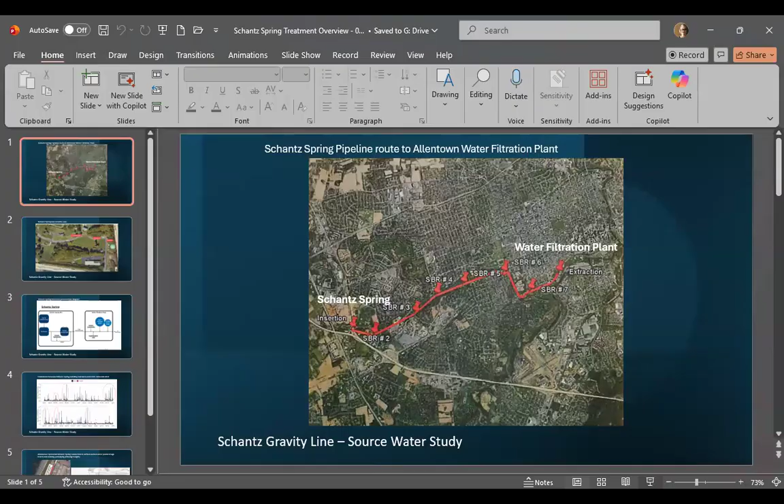This project's goal is to optimize Schantz Spring for increased protection of public health. We've got some graphics in a presentation to aid understanding. Schantz Spring is classified as a groundwater source and not required to undergo coagulation treatment or filtration. It is, however, sometimes impacted with turbidity during rain events.

The spring takes that route shown to get out to the water filtration plant, where it's currently integrated and sent through the distribution system, not currently filtered. For this project, we are continuing work to improve that quality to maintain public health during any rain event.

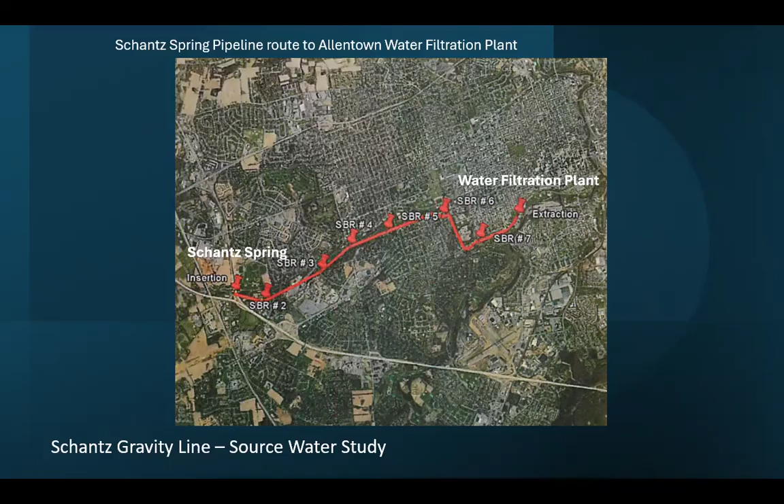There was an authorization done in March 2026 to begin conceptual design for the new interconnection at the filtration plant. With this potential coagulation and filtering, it'll just need to be routed into the plant at a different location than currently. Right now it just goes in and is pumped out through the distribution system.

This pilot testing authorization that GFT is proposing will continue on a larger scale the bench testing that's currently ongoing. They're determining coagulant dosing, filter effluent turbidity, head loss, filter run duration, and backwashing effectiveness. That pilot test we'll be authorizing today will influence the final design for the full-scale filtration that'll be installed.

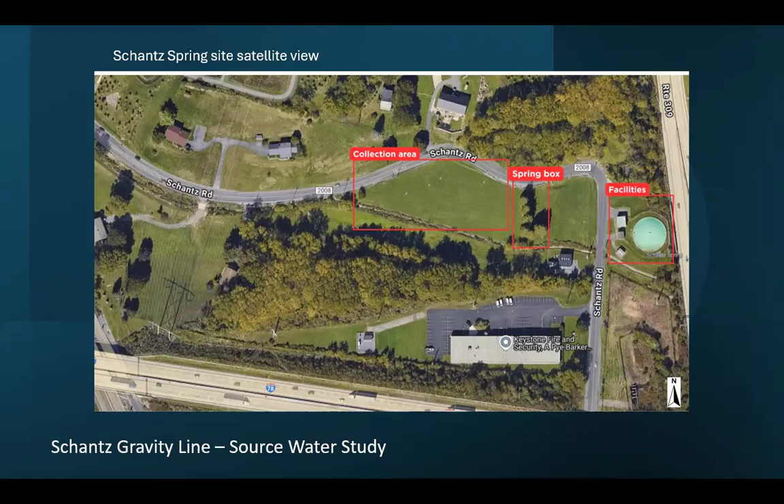On the screen we've got an aerial shot of Schantz Spring currently, showing the collection area and spring box. In the facilities over there is a reservoir. Part of this authorization will also determine the location for whatever treatment, whether at the Schantz Spring site or at the water filtration plant.

This illustrates the treatment process that will likely be implemented.

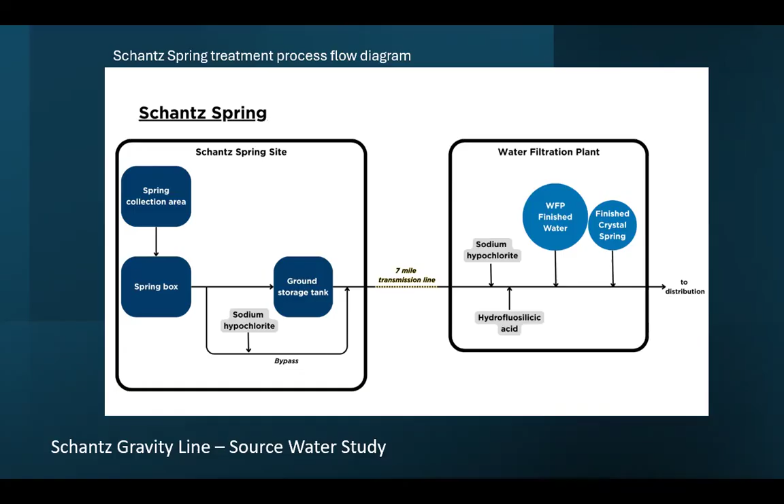These are potential connection points on the left side of your screen. In parallel, that conceptual design of the interconnection is currently ongoing, also with GFT. Today's authorization is just for the pilot scale filtration.

There's a lot of pipes in the ground along the areas outside of filtration. So that's what we're working on now, determining where we can get Schantz integrated into the filter system, ideally in a way that it mixes thoroughly with source water that's already being filtered, so filters don't have uneven distribution for what they need to do as far as filtration of the source.

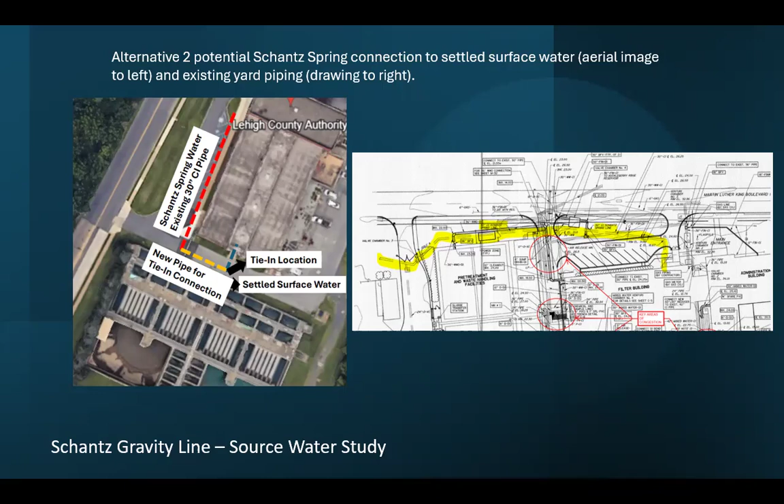So for these professional services to be authorized: project coordination, planning, pilot test protocol, the pilot test equipment, the testing itself, and then data review and reporting, assuming authorization of the planning phase work at this meeting. Expect to begin May 2026, with completion of testing in October 2026, and a final report submitted by December 2026.

Just want to offer one clarification on the paperwork. The total capital project authorization amount, or the total amount we're authorizing, is $234,800, but the professional services authorization is shown on the second sheet as $184,800.

How big a line runs from Schantz Spring to the waterworks? I think it's a 30-inch line. Yeah, and it flows by gravity, 7 million gallons per day, right around seven. How long's it been in?

Okay, I think the next item is the Kline's Island Sewer System Act 537 plan. Just for your information, those are on the white pages, pages 69 to 79. We haven't talked about the Act 537 plan in a little while, and we have a couple new board members, so it's a perfect time to give a little bit of an overview. We'll go through it pretty quickly, but then give you the more recent updates we want to share with you. Let me share my screen to go through slides, and Phil and I will tag team this one as we normally do.

Kline's Island Sewer System Regional Sewer Plan is exactly what it implies. It's a plan that affects the whole region that flows to the Kline's Island wastewater treatment plant in Allentown. This facility, the treatment plant and the system itself, is approaching 100 years old. The plant itself was built in the 1920s and expanded at various times throughout. The collection system, the interceptors, primarily built through the 1980s. We've reached a point in time where we need to reinvest, and that is the entire purpose of the Act 537 plan, or the sewage facility plan.

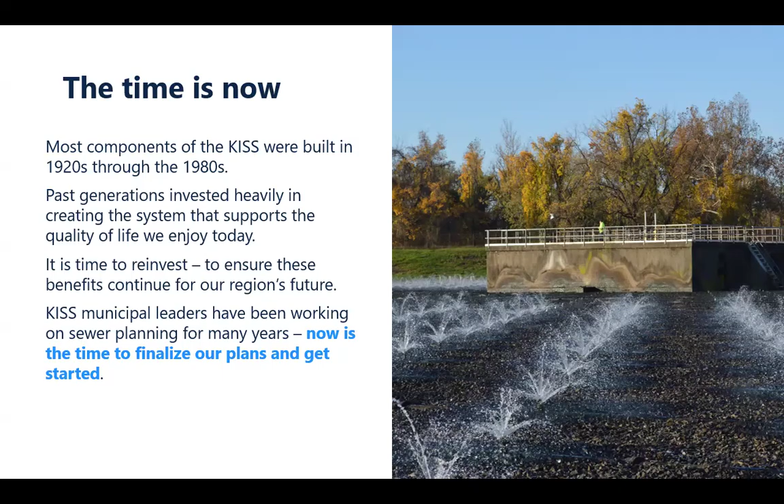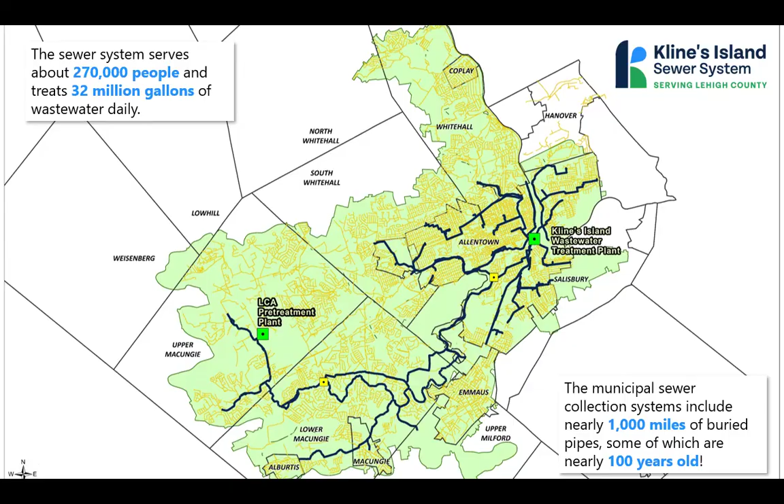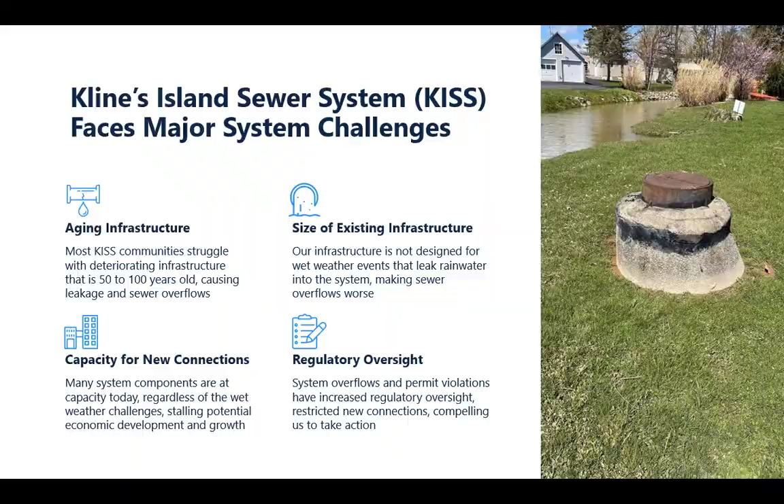When we embarked upon this regional plan, we were aiming to solve a few different challenges that we face and continue to face, aging infrastructure being kind of a root cause of many of our challenges. That is creating situations where we have leakage into the system, and that creates capacity issues because the leakage is taking up capacity in the pipe. We also have situations, since the pipes were put in the ground—especially the large interceptors in the 70s and 80s—they were sized for approximately 30 or 40 years worth of growth. Now almost 50 years have gone by, and so the size of the existing infrastructure is a constraint in some areas of the system. That has created a situation where we have constraints potentially on new connections. This is a growing system, and so that's a critically important problem to solve. And because of the overflows and various environmental challenges, our state DEP has taken a keen interest in seeing that this problem is solved. So that's kind of the background.

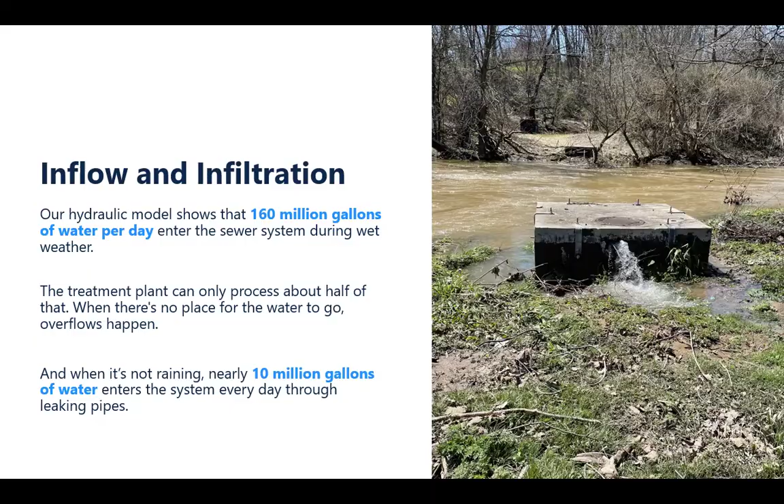So this is a graph that shows the 12-month rolling average of flow at Kline's Island versus precipitation. I just want to focus your attention on August of 18. That's when the recent situation started, and it stopped in July 19.

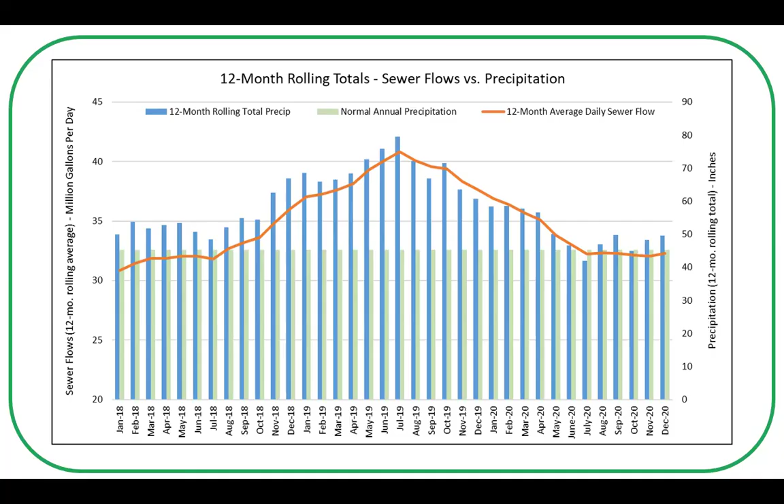However, in that period, we violated a number on our permit that DEP noticed right away. Technically, it's called a Chapter 94 violation. If you violate your hydraulic number 3 months in a row, it's an automatic violation. We did that twice. So we violated Chapter 94, which means an automatic DEP step-in, which we'll see in the next screen.

Before we get to what happened in 19 and 18, just want to remind everyone that this technically all started in 2007. EPA was involved for sanitary sewer overflows, SSOs, in the system. They issued 2 administrative orders, one at the plant and one in the collection systems.

So in the 2010s, there was a lot of collaboration. Lisa was involved with all that, I was kind of on the outside. We made it to 2018, right when the rain started. We submitted the EPA response in 2018. The rain started, and EPA stepped away in March of 19.

And they basically gave the keys back to DEP. Then we heard from DEP in August of 19. So DEP has not left us alone since August of 19.

In order to get connections in 2020, we had to submit what we wanted, and they granted that. We did the same thing in 2021, asking for the next 5 years of connections, which they granted, all with the intent that DEP must have this 537 plan in 2025, which we gave them in October 25.

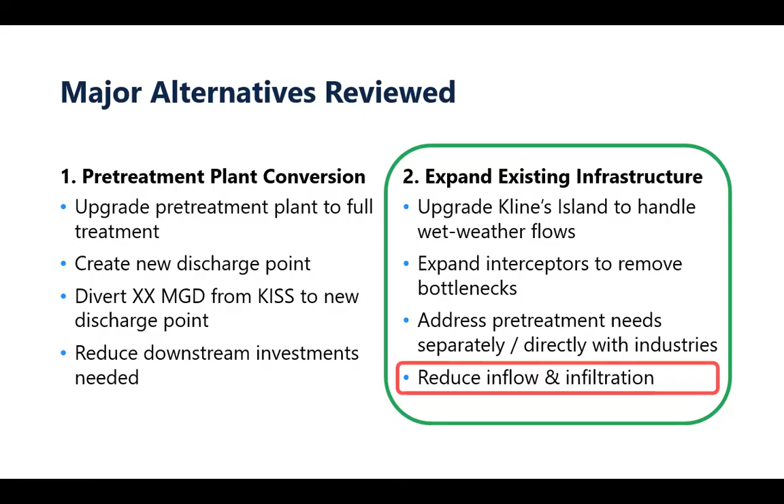But again, we've identified all the pinch points, we have solutions for them. We did not include them with the final package with DEP. DEP knows about the other problems.

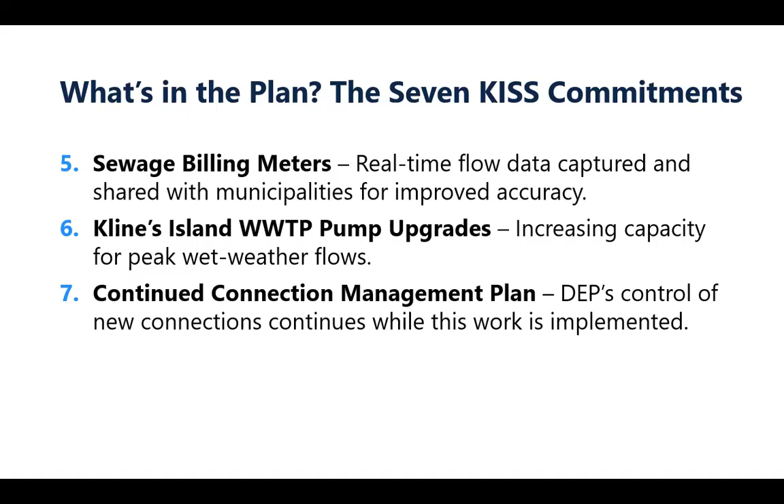I talked about Amy's pump upgrades at the head of the plant - that was one of the commitments we made. And then we heard this loud and clear from DEP that just because we gave them this 537, they're not going to go away. So they want to continue to monitor our progress, which means they're going to monitor our connections. Lisa's going to get into more details about what that looks like.

Sure. You want to go on? Yeah, you can do this, but yeah, sure.

So again, DEP - we've established a great relationship with DEP. They gave us a bucket of allocations in 2020, another bucket in 2021, and now they gave another one a month ago. Which is basically saying that the region has allocations to use at your discretion. But every time someone wants to connect to the system, they're requiring a planning module, which requires a municipal resolution. So they're forcing me to account for every single new connection.

And they require every quarter to get a report that basically shows the balance of the connections, and that's going to continue for the next 5 years at least. And again, that's been since 2020, so basically a whole decade of this scrutiny for new connections is what's going to turn out to be.

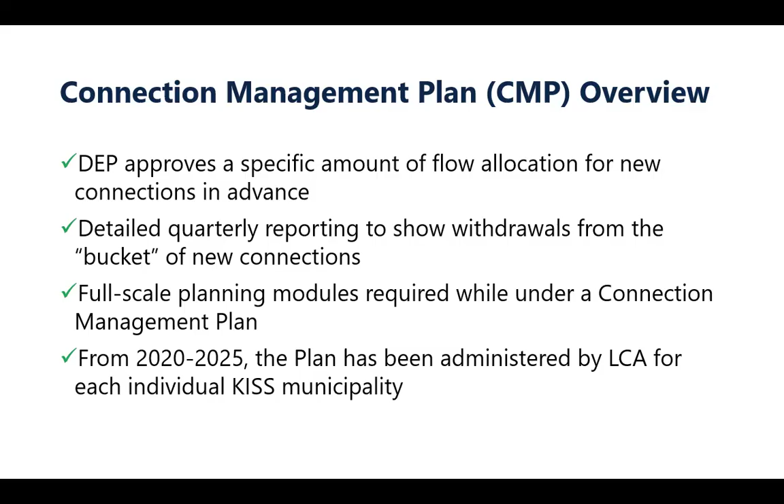DEP total granted the entire region about 4.6 million gallons, if you add up that 2020 and that 2021 allocation. So they gave us 4.6, and 5 years later we ended up using about 2.6. So they were a little aggressive with their planning, the municipalities were, but there's 2 million gallons left in the bucket.

We did this again - the planning commissions provided the numbers. So we've always just separated each municipality accordingly, and we just deducted from their total number, and every time you get a new one, you start deducting. That's what I've been doing over the past 5 years.

This slide is important because it represents how we've been doing things the last 6 years, and now we're changing focus because on April 3rd, the DEP approved the KISS Act 537 plan. It was a fairly short, succinct letter that you all have a copy of in your packet that says your plan is approved with a couple of things attached. I want to go over those things, but first take a moment to recognize the efforts of this organization and all the municipalities under Phil's leadership to get us to this point where we have an approved regional sewer plan, first of its kind. Congratulations, Phil.

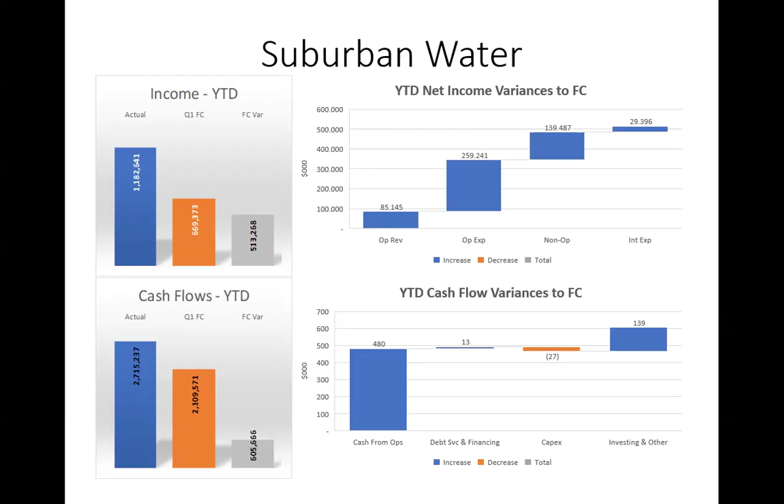Again, really no variance on a full year basis. We'll take a look at that in Q2. Just looking at some of the metrics, year-to-date debt service, we're 2.94. That's better than what we had budgeted for the year, better than our internal target. And it will come down a bit, but right now we're showing in a budget level. We'll see when we do Q2.

Operating ratio, we're 1.30, which is better than budget, better than target. And same thing for full year, we'll be at a budget level. Cash on hand is almost 342 days. That's good compared to 180. And we think for the year to be down in the neighborhood of 228.

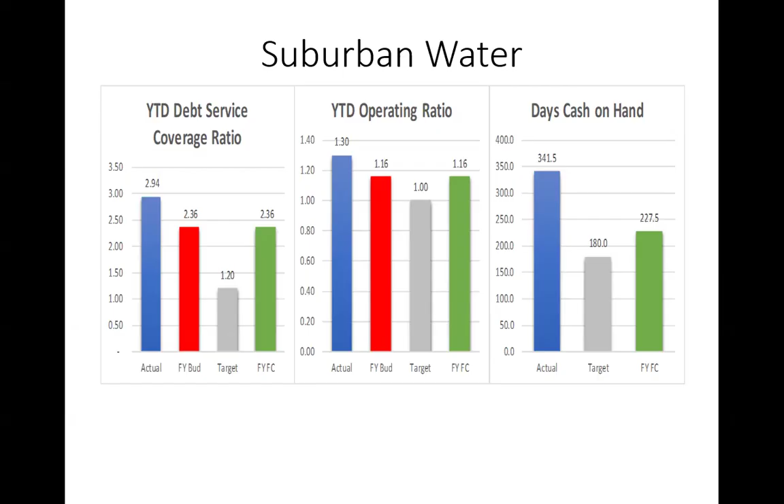Suburban wastewater, year to date, we are $443,000 favorable to forecast. You can see the operating revenues were down from where we thought they would be. We made up for that with lower operating expenses pretty much across the board. Again, interest income is a little bit higher than we projected, but interest expense kind of offset that being a little bit higher.

Cash flows year to date, we're at $988,000 favorable, most of that coming from the lower operating expenses that you see in the graph above. Nothing to speak home in terms of debt service and financing or CapEx. And we have $350,000 worth of additional income from investing activity.

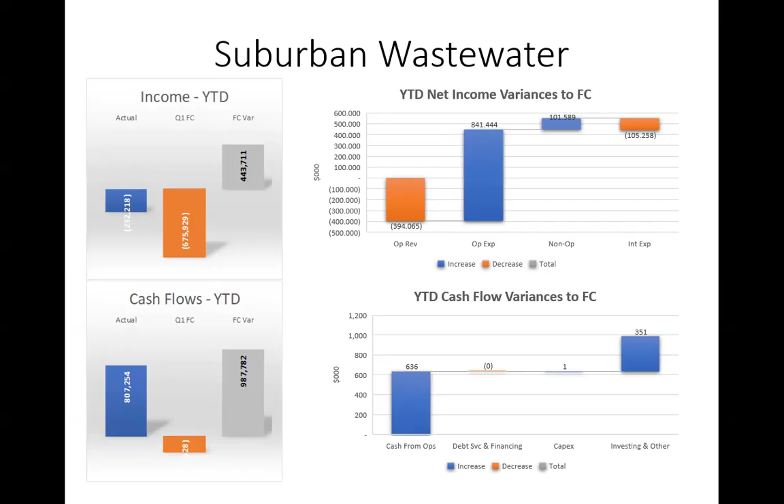Again, no variances full year. Metrics, debt service coverage, good, 3.06 versus 2.16 on the budget side, and better than our internal target. Full year, we'll kind of finish at budget right now.

Year-to-date operating ratio, we had budgeted to be less than 1. We're a little better than that so far year to date. And for the full year, we think we'll be at 0.90. Days cash on hand, good, we're 248 against the budget. It'll come down some because that's the way we budgeted to be a little bit less coming into this year than 180.